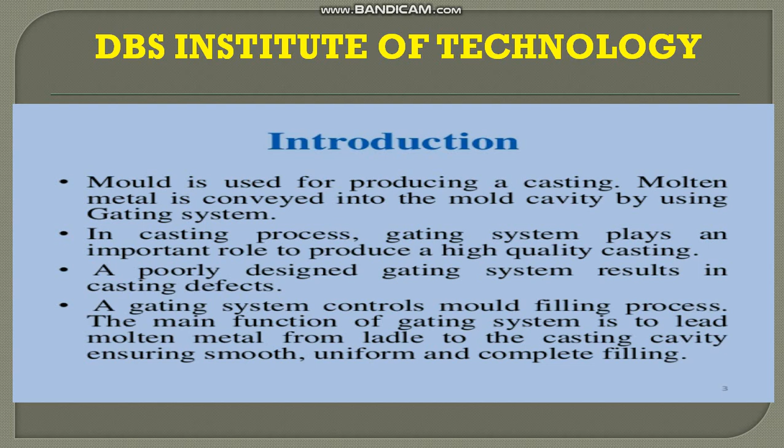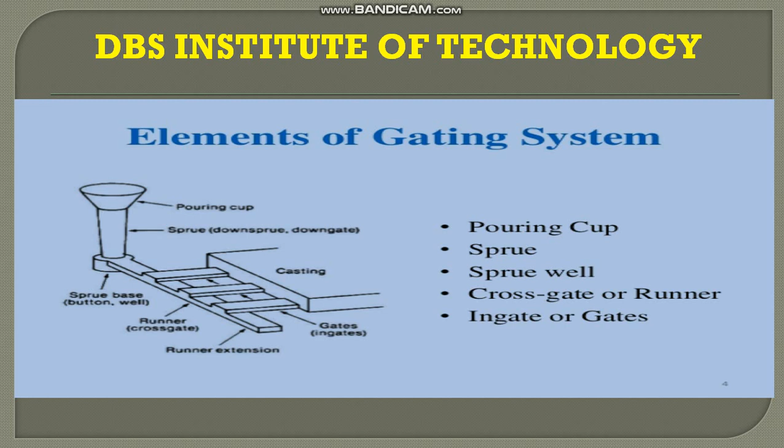Pouring cup. It is the funnel shaped opening made at the top of the mold. The main purpose of this pouring basin is to direct the flow of molten metal from the ladle to the sprue. Then what is a sprue? It is a vertical passage that connects the pouring basin to the runner or ingate. It is generally made tapered downward to avoid aspiration of air. The cross section of the sprue may be square, rectangular or circular.

Then what's a sprue well? It is located at the base of the sprue. It arrests the free fall of molten metal through the sprue and turns it by a right angle towards the runner. Then what's a runner? It's a long horizontal channel which carries molten metal and distributes it to the ingates. It will ensure proper supply of molten metal to the cavity so that proper filling of the cavity takes place.

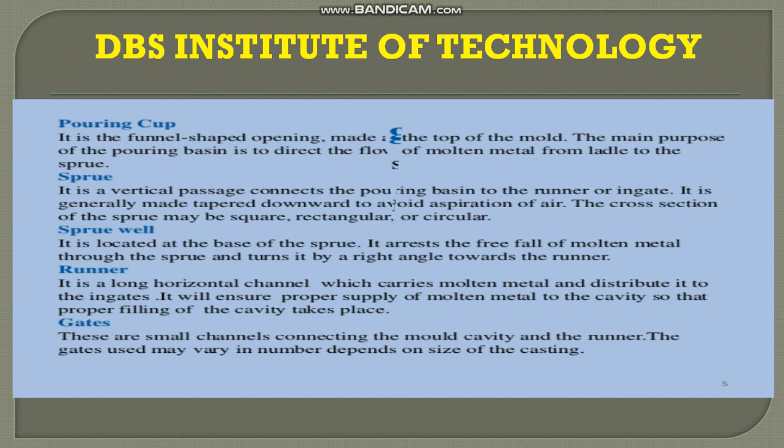Then gates. These are the small channels connecting the mold cavity and the runner. The gates used may vary in number, depending on the size of the casting. The functions of the gating system. A good gating system should help easy and complete filling of the mold cavity. It should fill the mold cavity with molten metal with the least amount of turbulence.

It should prevent mold erosion. It should establish a proper temperature gradient in the casting. It should promote directional solidification. It should regulate the rate of flow of metal into the mold cavity.

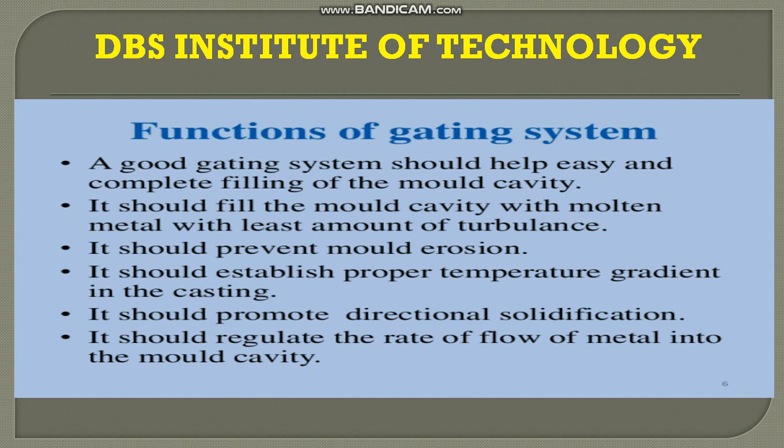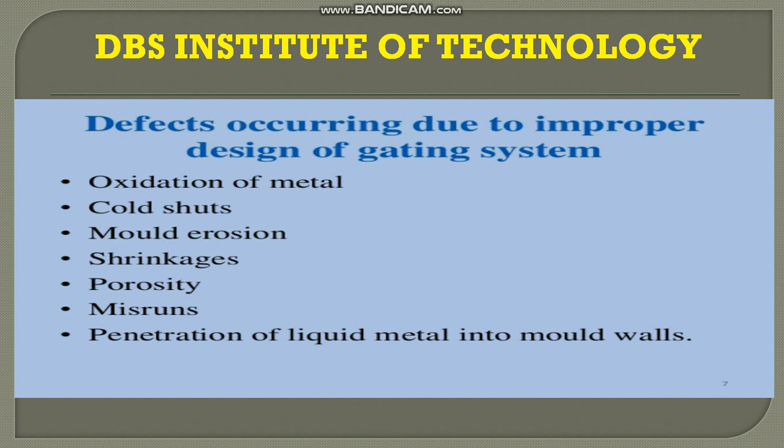The defects occurring due to the improper design of the gating system. If your gating system is not perfect, you are going to get different types of defects. So what are the defects? Oxidation of metal, cold shuts, mold erosion, shrinkages, porosity, misruns, and penetration of liquid metal into mold walls.

The types of gates. Depending upon the orientation of the parting plane, one is the horizontal gating system, two, the vertical gating system. And again, depending upon the position of the in-gates, in the horizontal gating system, one is the top gating system, two, the bottom gating system, three, parting line gating.

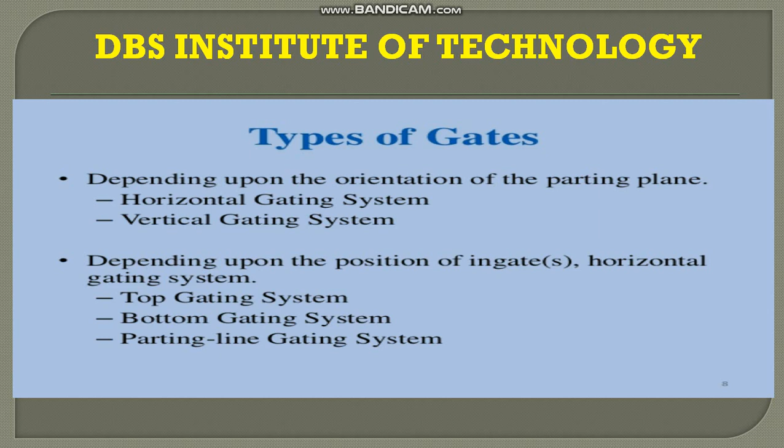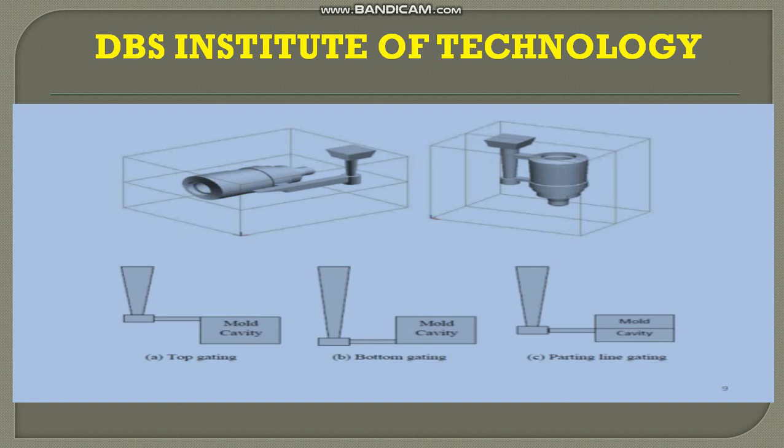Pouring time. The pouring time is most important. The pouring time is nothing but the time taken for filling the mold cavity by a known quantity of metal. That is, pouring time can be used as an index to determine the pouring rate.

When molten metal is being poured into the mold at a very fast rate, mold erosion, rough surfaces, and excessive shrinkage may take place. When the pouring rate is very slow, the complete filling of the mold is not assured and may result in an excessive drop in the molten metal temperature. This results in casting defects such as cold shuts, misruns, etc.

In order to avoid this, it is necessary to arrive at the correct rate of pouring of metal into the mold cavity. The type of metal, size, and shape of the casting decide the pouring rate.

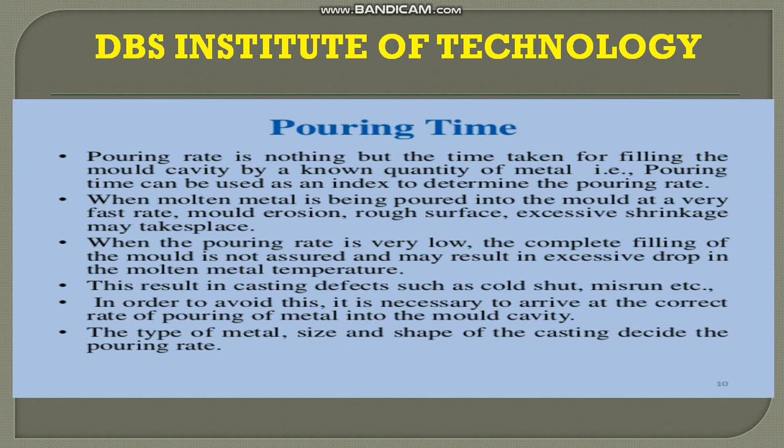Gating ratio. The gating ratio refers to the relation between the area of the choke, the total area of the runner, and the total area of the gates. Mathematically, it can be written as AC : AR : AG. AC is for choke, AR is for runner, AG is for in-gates. The gating system completely controls the molten metal flow.

A gating ratio such as 1:2:1 or 1:0.75:0.5 refers to a pressurized system, whereas the gating ratio